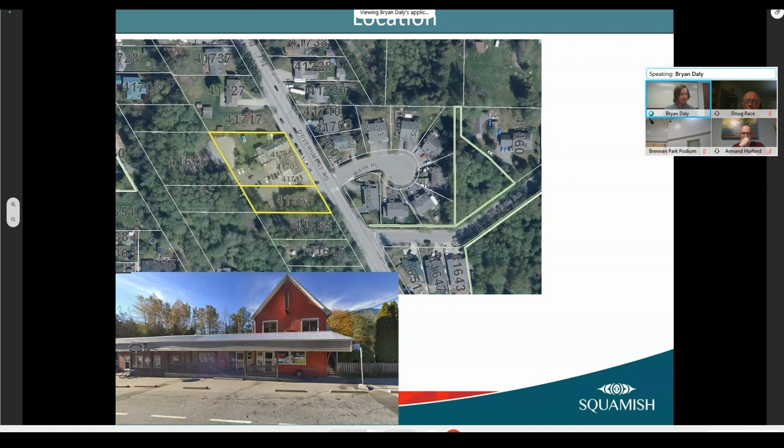I'm here tonight to present Development Permit number 539. The subject property is located at 41665 to 41707 Government Road in Brackendale and is currently developed with the Brackendale General Store building, which houses the post office, the Crabapple Cafe, the general store, and 3 apartment units.

The subject lands are zoned local commercial C1. The property to the south is also zoned C1, while other neighboring properties are zoned RS1 and RS2.

The property has been zoned various versions of local commercial since the first zoning bylaw was adopted in the 1970s. The property is identified as a neighborhood node in Schedule C of the official community plan.

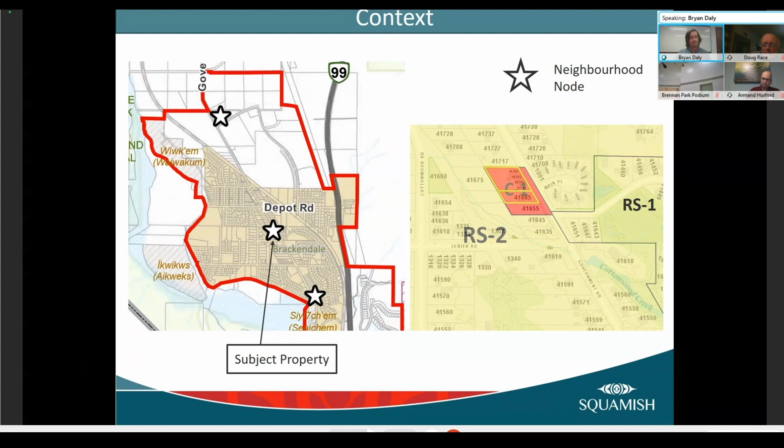The proposed development is located within a secondary floodway. Development Permit Area 2, protection from flood hazard guidelines will apply. Flood hazard and debris flow hazard are addressed through a separate delegated development permit, which has been conditionally approved pending issuance of DP 539.

The application is also subject to Development Permit Area 1, environmental protection, and Development Permit Area 3, universal guidelines for form and character.

The subject property is located within 30 meters of a fish-bearing watercourse and is subject to DPA 1, protection of the environment guidelines. The proposal meets the DPA 1 guidelines apart from a reduction in the streamside protection and enhancement area.

The reduction is from 20 meters to 17.6 meters to allow for parking in a previously disturbed area.

Staff are supportive of the reduction as it is in a previously disturbed, unvegetated area. The compensation proposed would enhance the remaining SPEA, and the 17.6 meter SPEA would still exceed the provincial requirements.

The technical report has been reviewed by district staff in the environmental department, who have accepted the recommendations in the report. The province has also reviewed and accepted the proposal.

The proponent has agreed to enter into an environmental protection covenant that will preserve the SPEA in perpetuity and preclude the development of a duplex at 41675 Government Road. The previous owners obtained an approved development permit to allow for the construction of a duplex at 41675 Government Road.

The current owner has not submitted a building permit application for the duplex yet, pending the outcome of this application.

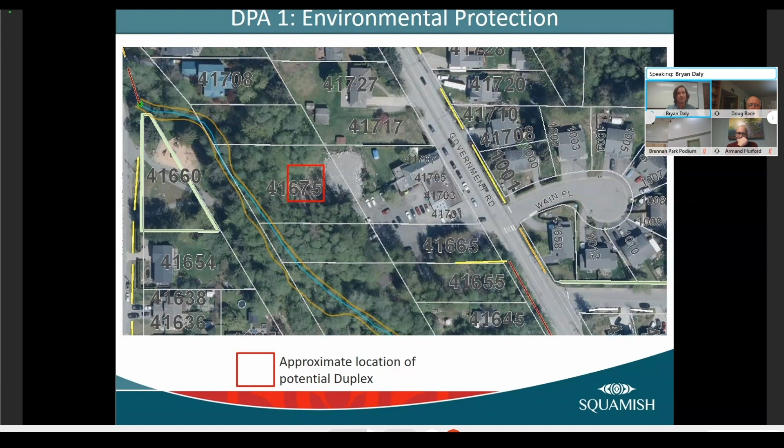This DP application seeks to allow for the construction of 2 mixed-use buildings while retaining the existing Brackendale General Store. Building A is 4 stories and consists of 15 rental apartments and 1 ground floor commercial unit. Building B is 4 stories and consists of 13 rental apartments and 1 ground floor commercial unit.

The new commercial units are approximately 1,000 square feet each. The existing general store building consists of 3 apartment units and commercial on the ground floor.

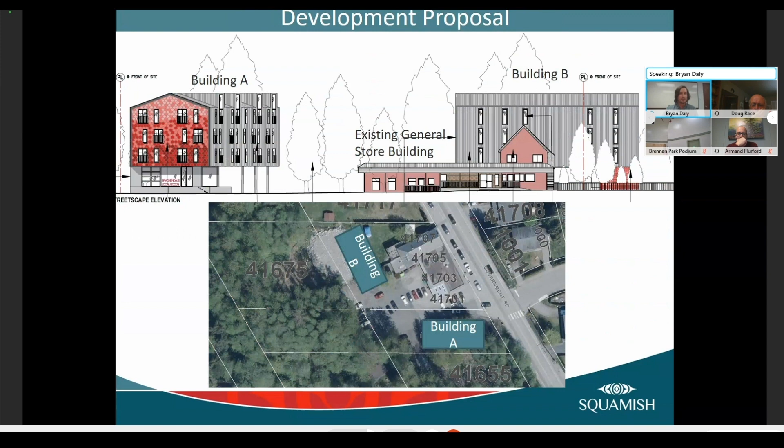The development proposal meets the requirements of the C1 zoning. The C1 zone allows for 1 principal building per lot. Building A is located on its own parcel, meets the required setbacks, and is proposing an FSR of 0.75 and a lot coverage of 27%.

Building B will be attached to the existing building on site by an elevated walkway and deck that will provide access between the buildings and to the shared deck and outdoor space. Building B meets the required setbacks and is proposing an FSR of 0.66 and a lot coverage of 30%.

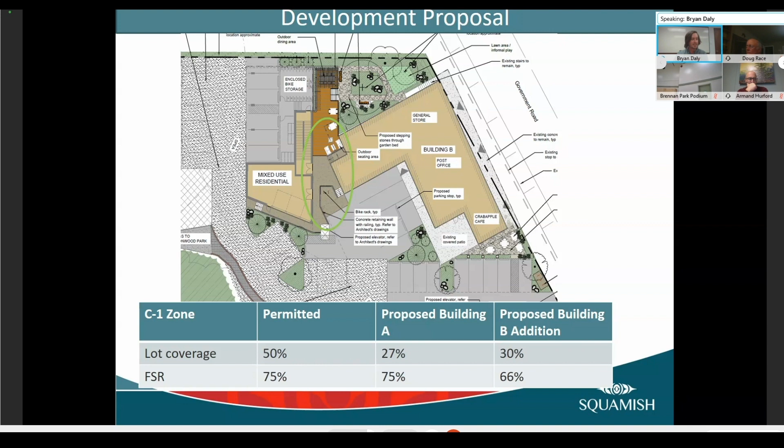It should be noted that as part of the zoning bylaw update, staff intend to propose removing the 1 principal building per lot requirement in commercial zones, as there are other density regulating provisions in place, and the requirement results in either buildings connected by accessory type structures or larger buildings.

The proponent has agreed to enter into a housing agreement that would secure 6 of the studio units on site as moderate income rental housing.

Moderate income rental housing units are rental units that offer a rate that is less than market rental, but do not qualify as affordable housing under the perpetually affordable housing policy. The moderate income units would be spread across each of the 3 buildings on site, 2 studio units in each of the new buildings and 2 studio units in the existing building.

The rents associated with the moderate income rental units would start as follows: 2 studio units in building A at $1,050 per month, 2 studio units in building B at $1,050 per month, and 2 studio units in the existing building at $950 per month.

These rents are approximately 20% lower than current market rent for studio apartments. While CMHC does not provide market rents for studio units in Squamish, a recently completed rental project has studio units listed for $1,425 per month. The 6 units represent 20% of the total units on site.

The remaining 24 new apartment units and the 3-bedroom unit in the existing building will be secured as market rental in perpetuity. The housing agreement will be brought forward for readings should this development permit be approved. The new market rental units consist of a mix of studio, 1, and 2-bedroom units. All new units will have dedicated in-suite laundry.

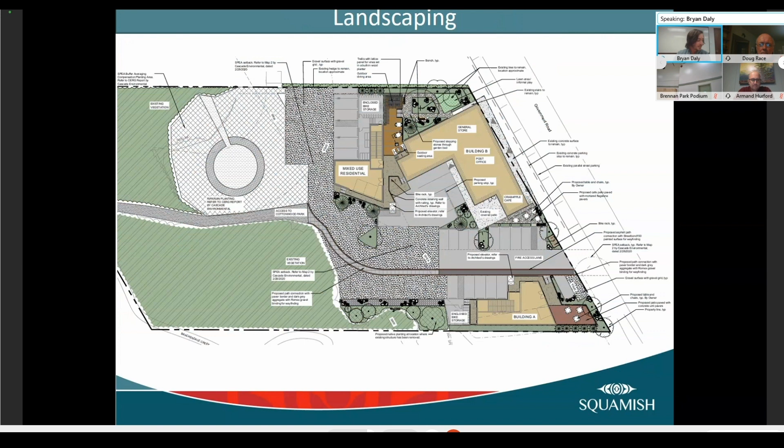All residential and commercial Class A bicycle parking spaces will be located within 1 meter of an electrical outlet. Class B bicycle parking is located adjacent to the drive aisle entry to the project, with parking for 6 bikes. There is another Class B bicycle parking rack adjacent to Building A, with parking for 4 bikes.

The development is accessed off Government Road. Vehicle parking consists of surface parking at grade. The existing parking area is primarily crushed gravel and accommodates roughly 18 parking stalls. The parking area is located within the SPEA, will remain unpaved, and the design intent is the use of crushed gravel in GeoGrid, where required, to maintain a permeable surface, and select areas of asphalt paving at the loading area and the high traffic area between the existing building and Building A.

The proposed development requires 39 residential parking spaces, 10 commercial parking spaces, and 8 visitor parking spaces. The development is providing the 39 required parking spaces and requesting a variance to section 23.9 off-street parking of the C1 zone to allow for the required visitor parking spaces to be shared with the commercial parking spaces, for a total of 49 off-street parking spaces.

2 of the shared visitor and commercial parking spaces located in front of Building A and 12 of the residential parking spaces located under the cover of the new buildings will be provided with access to electric vehicle charging receptacles.

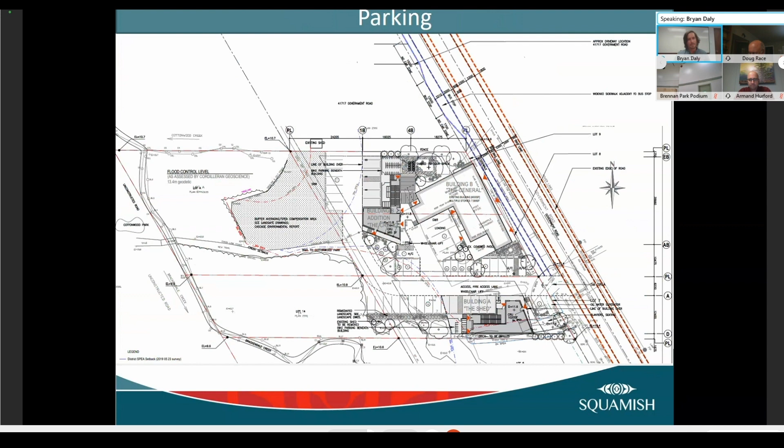Notable frontage improvements associated with this application would include relocating the existing bus stop south of the proposed development to the north of the general store in the district's road right-of-way. The existing bus stop is below standard and located next to a fish-bearing ditch. It must be relocated in order to be improved.

There is sufficient space within the district road right-of-way to accommodate a new bus stop, sidewalk, and bike lane in front of 41717 Government Road. The sidewalk and bike lane would continue down in front of the existing general store building. The existing on-street parking stalls in front of the store would remain. A crosswalk will be improved to bring pedestrians to the existing sidewalk on the east side of Government Road.

This development proposal is requesting 3 variances to the zoning bylaw. The first variance request is to section 23.3, to increase the maximum height from 12.18 meters to 14.5 meters. The maximum height in C1 is 10.68 meters. However, section 4.10D, maximum height of buildings and structures, allows for a 1.5 meter height bonus for areas with high flood construction levels, provided certain criteria are met, which this development qualifies for.

Staff are supportive of the height variance request as the units are being secured as moderate income rental and market rental in perpetuity, and it would improve the livability of the units on the top floor of the building. The variance also facilitates a pitched roof design, which is consistent with the local character. Given the number of property constraints and aspirations, including preservation of the existing general store building and environmental setbacks, the project is very limited in its ability to expand the building's footprint.

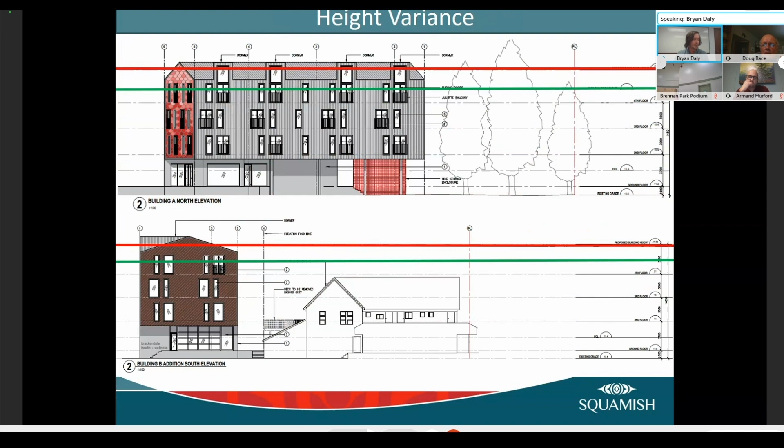This slide shows the elevations of both buildings with the maximum allowable height highlighted in green and the requested height highlighted in red.

The second variance request is to section 23.9, to allow for the required 8 visitor parking stalls to be shared with the commercial parking stalls. The proponent has provided a trip generation and parking review study that confirms that the 39 required stalls for residential units would be provided, and that 10 stalls remain that could be shared between the required commercial and visitor parking stalls. The zoning bylaw requirement for this development would be 57 stalls.

The report highlights that based on Table 2, shared parking percentages by peak period, a deficiency of 8 stalls during the peak period of weekend morning and afternoon may occur, based on the residential and commercial classes of use. It should be noted that there is no differentiation between required residential parking spaces and required visitor parking spaces in Table 2 under the residential class of use. Given the residential use class is not based on the visitor parking stalls, the peak demand percentage is likely much higher than would be associated with visitor parking.

The report also states that the new development should not have a negative impact on the traffic and parking in the surrounding neighborhood. The expected increase in additional vehicle trips would equate to 1 vehicle entering or exiting the site every 2.5 to 4 minutes during peak hours period, which the report states is a minor change. Staff support the variance request as it is common for visitor and commercial parking to be shared. There are examples of other mixed-use zones, such as MUD 1, that allow for shared commercial and visitor parking.

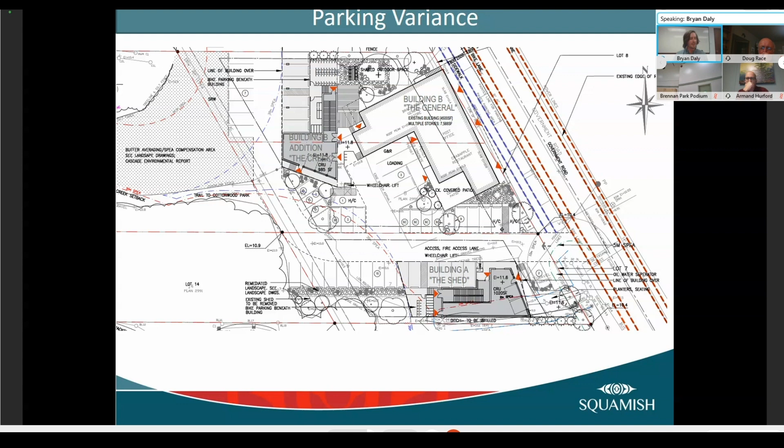The third variance request is to section 41.11 BI, design criteria, to eliminate a small section of 2 meter wide landscape screening along the northern property line. Providing the 2 meter wide landscape strip in this location would result in the loss of 2 parking stalls, as they would no longer meet the minimum dimensions. There is an existing fence along the northern property line, and the proponent has offered to construct a trellis with climbing vines to screen the parking stalls in this location.

The trellis and screening will be included as a condition of the development permit, and maintenance of the screening will be included as a requirement of the environmental covenant. Staff are supportive of this variance request as it would accommodate 2 required parking stalls, and the screening proposed by the proponent would serve the same purpose as the required 2-meter planting strip.

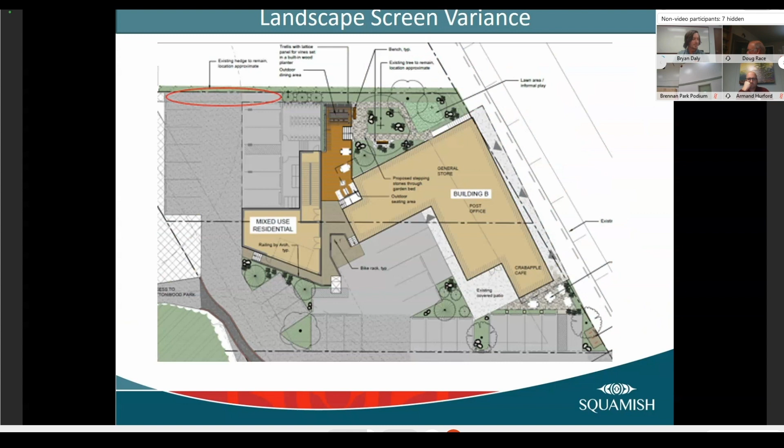Legislated and district processes for engagement were followed for this application. A development proposal sign was installed on the property and the project was advertised on the development showcase. An online public information meeting was held on the Story Maps platform for one month. Variance notification was delivered to properties within 100 meters.

A high number of public comments were received. The majority of the comments received were not in support of the variances.

As noted, the majority of the public concerns were related to parking and the overall height and density of the building. While these present valid concerns, staff feel that the project is addressing a number of important items, such as the preservation of the environmentally sensitive area, the preservation of the existing general store, providing additional ground floor commercial space in a neighborhood node, and providing moderate income rental and market rental housing in a neighborhood of predominantly single unit development.

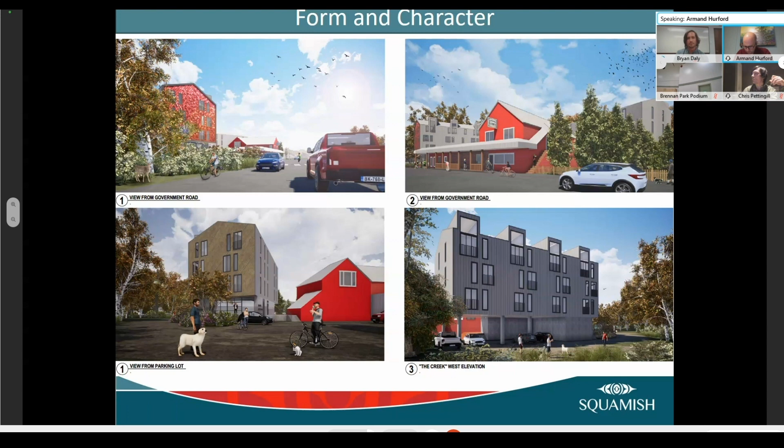Through the mayor, we are currently developing our waste stream guidelines, so there is nothing that would preclude that from happening currently. It is not uncommon for this type of development where the buildings are situated close together and limited in the area where they can locate the waste stream, given the substantial SPEA on site. The opportunity is limited for the locations where they could put that waste room.

I just note that the waste facility is in close proximity to all three buildings, but the actual exit from the apartments in the existing building is to the very northeast corner of the property, making it a long trek around to get to the appropriate spot. So I don't know that proximity to the building necessarily sits right for me.

Sorry, one more, but this will be my last for now. There's lots of mentioning about stormwater, and the ADP notes go into, the quote was, consider a robust rainwater management strategy. There's also talk about pooling in the existing parking lot. I think they both kind of miss the point of that specific site. It's not so much rainwater management as it's spring water. There are springs coming out the bottom, basically the toe of the Cheekye fan there. There are pumps operating in the basement of the existing building, pumping water out daily, I think 24 hours a day. So that puddle, that one pothole you go through on your way in, is a spring.